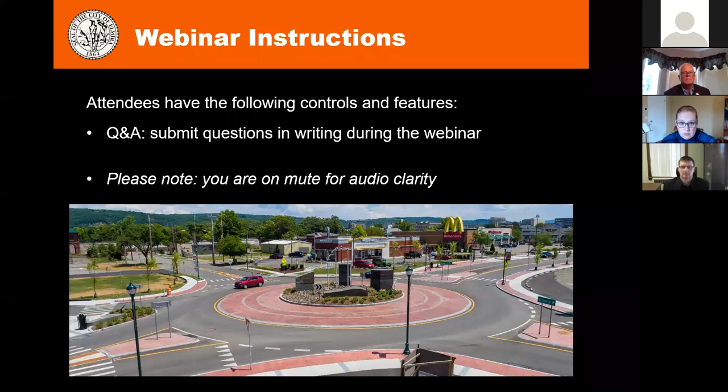I'm Emily Smith, Director of Transportation for Fisher Associates, and with me today presenting this topic are Dennis Judson, our Client Service Manager and Project Manager for this particular project, and Andrew Avery, the Public Works Commissioner for Chemung County and the City of Elmira.

Thanks everybody, I appreciate your time on this hot summer day for taking time to observe this video. This is a very exciting project. The primary purpose of the presentation is to discuss some of the different challenges associated with the design and construction of an urban roundabout.

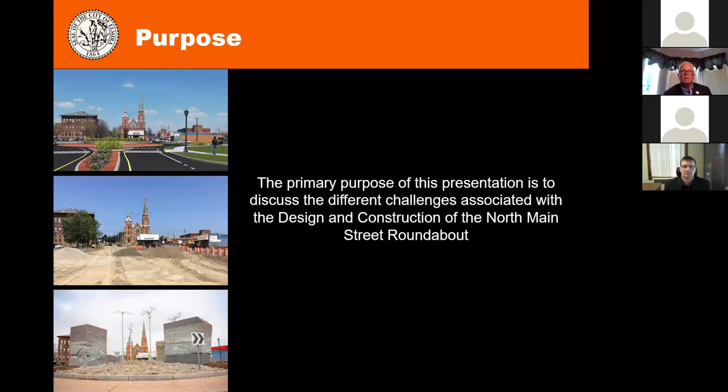Specifically the one at North Main Street in Elmira. The agenda today - I want to talk a little bit about the ownership, the location, history, some of the objectives, talk about specifics of the project, existing conditions, and then the majority of the project is talking about some of the project challenges we had along the way. We'll end it with some construction photos and open it up to questions.

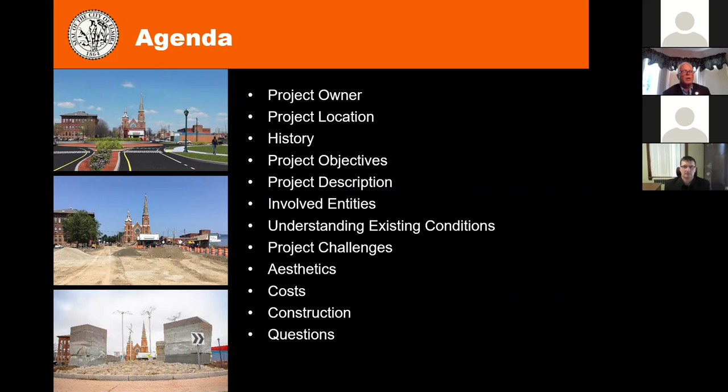The project owner is the City of Elmira, and Andy Avery, who is the Commissioner of the Chemung County DPW, also oversees all the street design projects for the City of Elmira. I want to thank Andy, his staff, both the county and the city, for their guidance throughout the project. It certainly wouldn't have been possible without them and without him specifically. Andy's going to take you through the history of the project, and then we'll get back to some of the technical stuff.

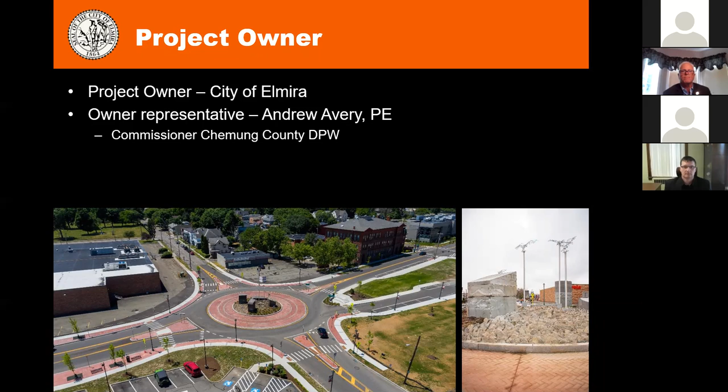Good afternoon everyone, thanks for joining us. Elmira, if you're not familiar with it, is in New York, in the southern tier. We're about 5 miles from the Pennsylvania border. We also don't have a ton of snow here compared to some of you along the lake regions and other parts of the state - we typically get under 40 inches a year, just to put it in perspective. So snow removal isn't as big an issue for us on roundabouts.

Our project area is actually at the very heart of our downtown, between Elmira College and our business district and commercial district. We're located near a McDonald's, a Weis shopping market, a Walgreens. So a lot going on in this direct area.

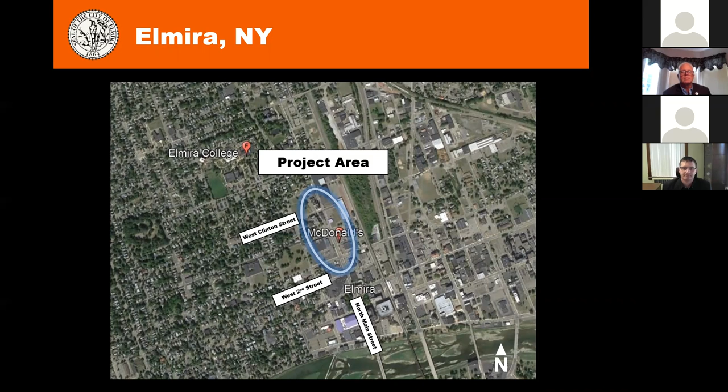Really, this shows you how important a comprehensive master plan is. You're not planning for tomorrow, you're planning for decades down the road. We started this project in 1998 with our last comprehensive master plan update. We were looking to strengthen our infrastructure, our roads, our bridges, colleges.

We have Elmira College, we have a Corning Community College campus, and now we have LECOM, which is Lake Erie College of Osteopathic Medicine, that has a new campus in Elmira. Also wanted to make sure that we took care of our manufacturing businesses, recreation for our residents, and try to maintain quality neighborhoods. I myself live in Elmira, so I want to make sure that this is a great place to live and work.

We're looking to improve vehicular circulation, pedestrian routes, and really reconnect those neighborhoods to the downtown. We're not just an automotive society anymore. We like to walk, we like to bike, and we want to make sure we got this right.

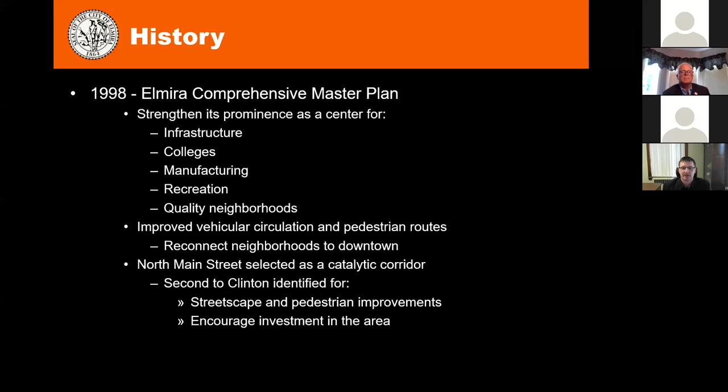North Main Street was actually selected many years ago as a catalytic corridor, and we looked at streetscape pedestrian improvements. We wanted to encourage investment in the area. And really this goes back to 2006.

When we partnered with DOT and Elmira College to study the corridor from 2nd Street to Washington Avenue. This took us all the way to basically the northern end of Elmira College. We looked at 3 phases - Phase 1 from 5th Street to Washington Avenue, Phase 2, West Clinton to 5th, and then Phase 3, 3rd to Clinton. This roundabout is actually Phase 3.

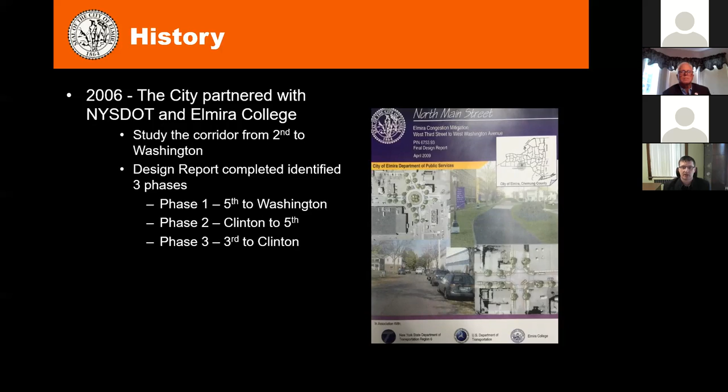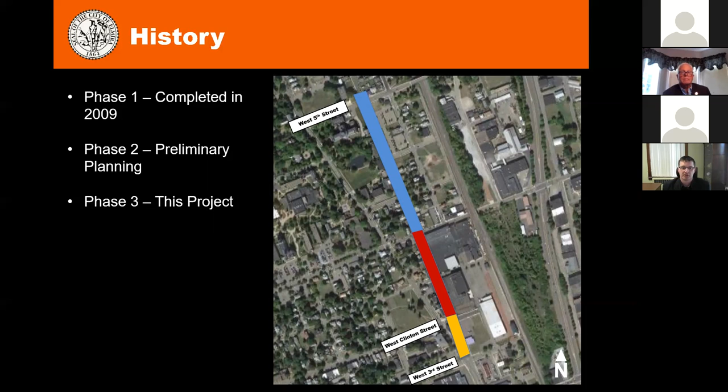So in 2013, we applied for a STEP application, Strategic Transportation Enhancement Program. That was competitive statewide. We wanted to expand the project to include more of North Main Street down to 3rd Street and 2nd Street, all the way to the viaduct. It's important to note we wanted to go to the railroad viaduct because it connected directly to our Elmira Promenade project, which now gives us a completed pedestrian bicycle corridor from the northern end of Elmira College all the way to the river. So that was an important part for us.

This project became known as the North Main Street Cultural Connector. We did receive $3.6 million of funding for the overall $4.5 million project. When I say the 3.6, that was federal and state funding that really got us a big part of the way toward completion.

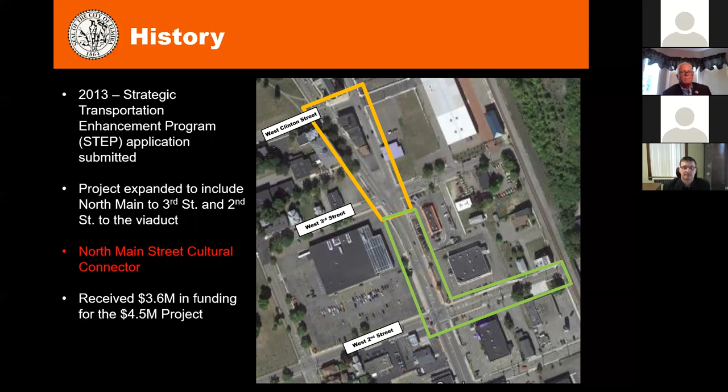So recall, the name of the project is actually the North Main Street Cultural Connector. You might ask why, and let's show you graphically. Here's the location of Elmira College, just north of the project limits, the educational center for the city. Then we have the Chemung Riverfront, which is being continuously developed. They're using a lot of the state's DRI money to do redevelopment in the area, and just because you're on the waterfront, it attracts people.

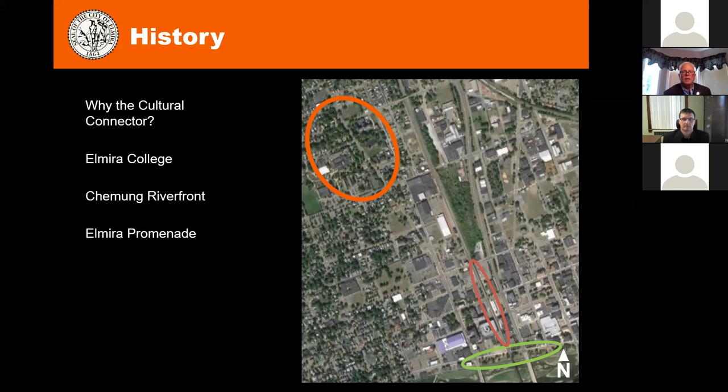The Elmira Promenade that Andy mentioned was a refurbished railroad viaduct done about 7 or 8 years ago, with the intent of drawing festivals, music, and people gathering to another part of the downtown area. In and around these two places was all the cultural centers for the city - the art museum, the history center, and a lot of the government activities as well.

So this project came along, and it kind of makes sense that it created a cultural connector, allowing people to walk safely to and from the different cultural centers in the city. So actually quite simple, but it has been a huge benefit to the city of Elmira.

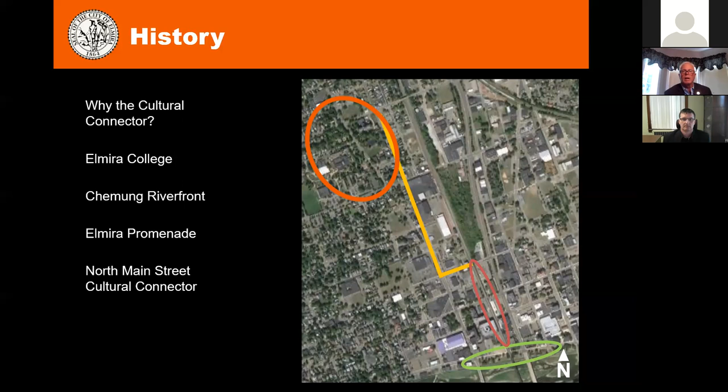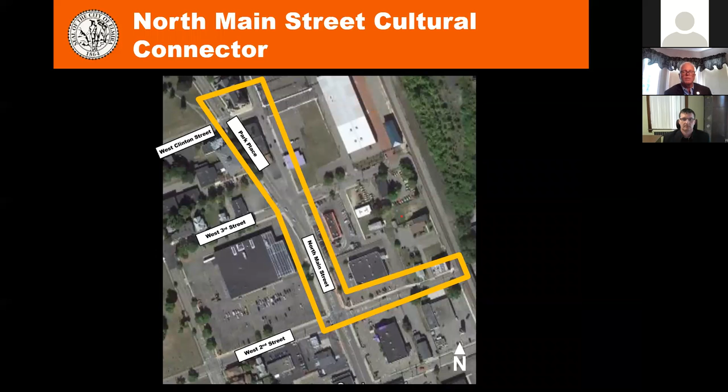So here's the project we have today, in its entirety. It's North Main Street from West Clinton down to 3rd, and 2nd Street from North Main Street to the railroad viaduct. This will complete the cultural connector.

Like most projects, we have project objectives, similar to some of the other ones you've seen in other projects. We wanted to make the pavement a lot better so it lasts longer. Like most older cities, pavements don't get a lot of attention over time, just general maintenance, so we want to make sure we create something that's going to last a long time.

We want to improve the pedestrian facilities. There's a lot of existing sidewalks out there with tripping hazards that don't meet ADA standards, so we want to improve those facilities. The primary focus of the project is to improve the intersection geometry at the North Main Street, 3rd Street intersection, with Park Place also playing a part, with an ultimate goal of reducing the potential for crashes and increasing safety for all modes of transportation.

And then finally, we wanted to create a complete street corridor, including the installation of pedestrian amenities, lighting, landscape elements, and other aesthetic features to make the area more welcoming.

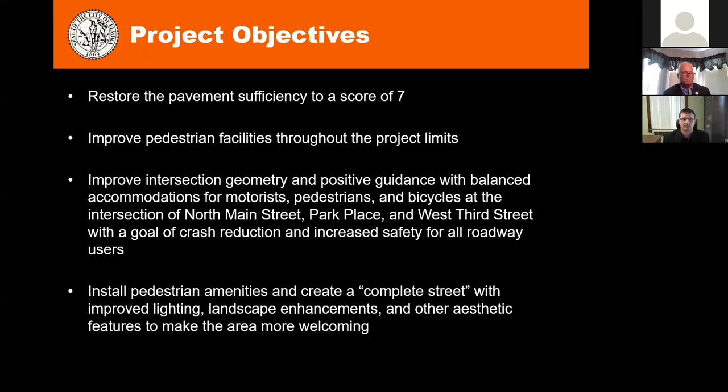So what's really the big issue? This picture identifies what the primary issue is. You're looking north, just south of the 3rd Street intersection. 3rd Street enters North Main Street just north of that green light pole. As you can see, there's a massive amount of pavement here with very little direction from either signing or striping on where you're supposed to be.

Really, the only spot you know where you're supposed to be is if you're in that red car on the left-hand side of the photo, coming southbound, you've got to stay to the right side of the yellow line. If you're a visitor or someone heading north, where do you go? North Main Street, as Andy mentioned, on the right is a continuous one-way northbound street on the right side of the split. The other side of the split, heading left, is Park Place, once it gets north of the point there, and that takes you into the educational center up to Elmira College.

From a pedestrian standpoint, you see very few markings. Pedestrians really have a difficult time knowing where traffic is going. I'll show you a video in a second and talk about how pedestrians really have a tough time getting across the street here.

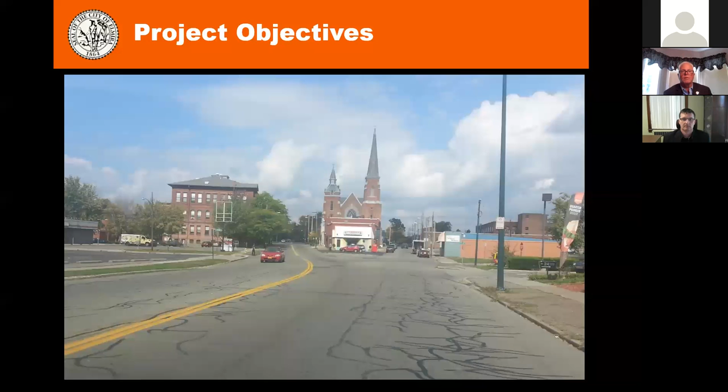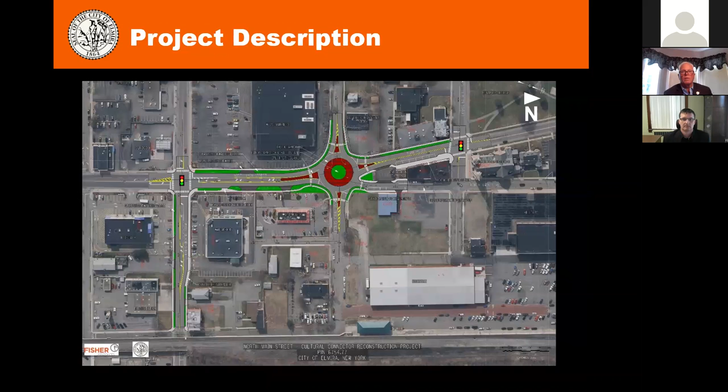Lots of coordination throughout the project, as you might imagine in a city. We have the City of Elmira, New York State DOT, and FHWA who provided the guidance and the funding. Elmira Water Board and the DEC who played a role in helping get us permitting and upgrading existing public utilities, along with the Chemung County Sewer District.

Public utilities, they were very helpful here. They got out of the way early. I'll talk about that in a couple minutes.

The emergency services, the fire department, police, we had a lot of coordination with them to make sure that they understood that this project was going to enhance their ability to maneuver through this intersection more efficiently and safely. And in fact, there is a fire station right on the project on 2nd Street, so they had a significant impact.

A couple other entities played a role. Elmira Downtown Development was a major factor in helping us get all the businesses together in one place to talk with them. And then an entity that was created during this project, not necessarily as a result of it, but the development of the Community Arts of Elmira, and they played a pretty big role in the development of a lot of the aesthetic enhancements.

And then of course there was the consultant team.

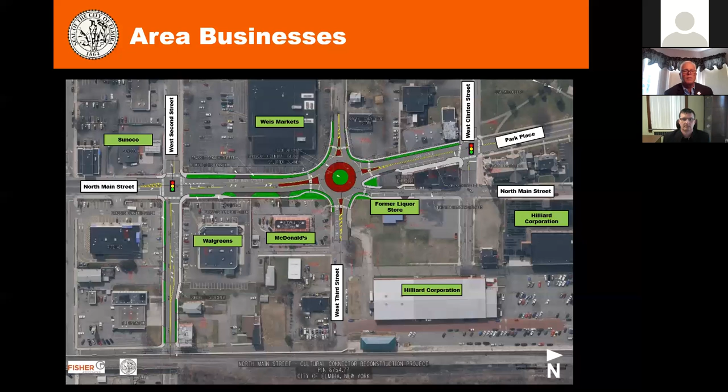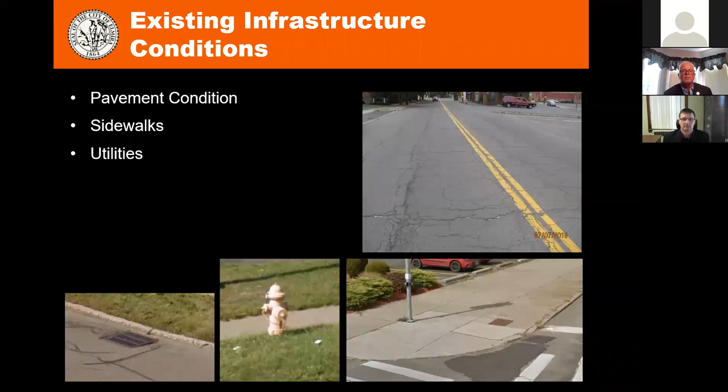A little bit about the existing conditions. Like most cities, keeping up with all your pavement, sidewalks, and utilities is an endless task. Not a lot of money in many cities, so stuff tends to not get taken care of as soon as it needs to be.

Here's a perfect example of the pavement and drainage in the corridor, in pretty rough shape and certainly in need of reconstruction. The photo in the top left was taken at the point area, at the split area, with some significant drainage issues.

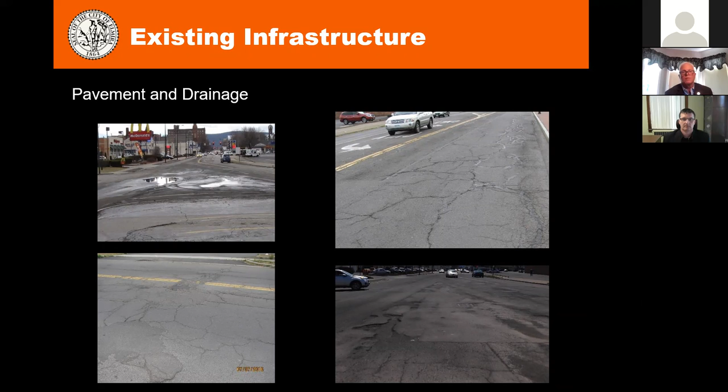Sidewalks existed throughout the entire project corridor. Some of them in rough shape, as you can see by the photo to the left. Some of them narrow and of different surface treatments. There were some areas where newer sidewalk was put in, either by city forces to repair some really poor sidewalks or by development.

And when the city or the development put stuff in place, they did everything they could to meet the ADA regulations at the time. However, as you know, they change over time regularly. And at the time of the design and construction, really none of it met the current ADA standards, so that all had to be brought up to standard.

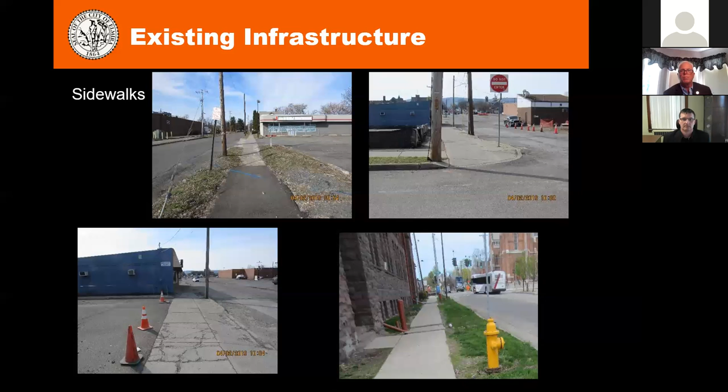Utility companies and utilities, talking about the private ones first. The City of Elmira does a great job of coordinating early on with all the utility companies. They knew this project schedule well ahead of time, the private ones did, and really, they got out of the way before we even started design. So with the exception of just minor connections for upgraded signals and lighting, the private utilities were out of the way well in advance of the project even starting.

The public utilities, water and sewer mostly, you can see go right through the roundabout, and we needed to address them during the design and the construction, and we'll talk about that in more detail.

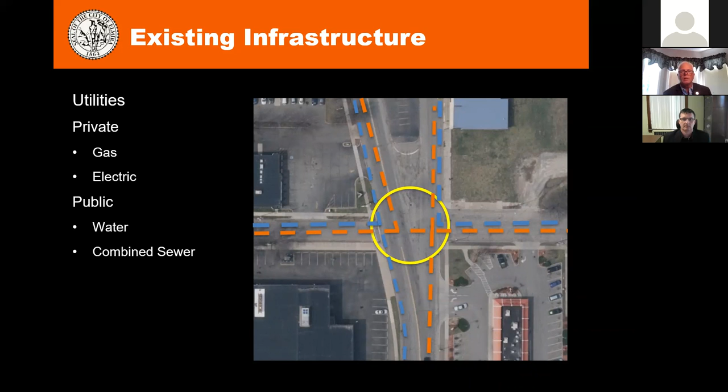From a traffic standpoint, we did the typical stuff, updating and collecting traffic volumes for all modes of transportation, doing our level of service analysis, and it was indicated that the volumes through the intersection were about 1,100 vehicles per hour, which equates to a little over 12,000 vehicles in a day.

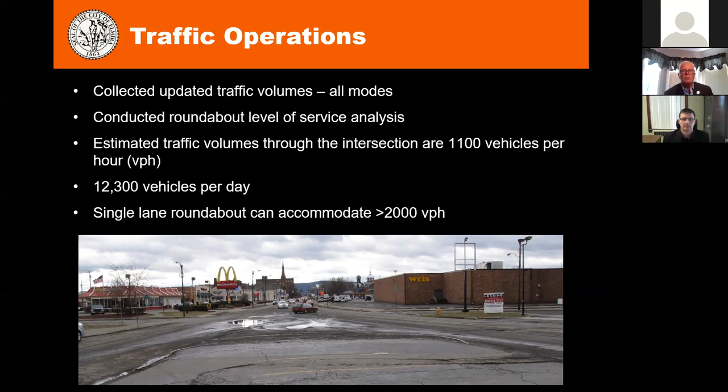For those of you who don't know, a single lane roundabout can accommodate a little over 2,000 vehicles an hour. So it really wasn't about the volumes, and certainly not just about the volumes here, because the roundabout could handle the volumes.

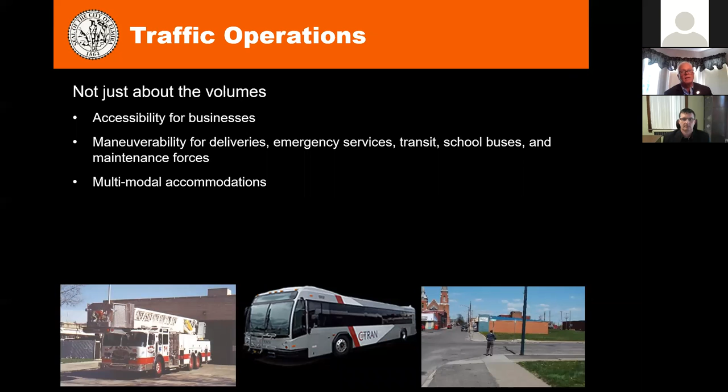Redoing the intersection with a roundabout was really about accessibility for businesses, maneuverability for delivery vehicles, emergency services, transit, school buses, making sure they could get through this intersection more safely and more efficiently. We also wanted the businesses to know how their businesses would be operating, how they would access their businesses after this was all done. In addition, we needed to accommodate all the modes of transportation.

We also had to look at the crash history. When we did the design report, we studied the most recent 3-year history. At that time, there was 22 crashes in the previous 3 years in the project area. 10 of them of note were at the specific intersection at 3rd Street, North Main Street intersection.

We then looked at the previous 7 years, so 10 years in total, and at that specific intersection there was 24 accidents. So as you can see, the 7 years leading up to the 3 there was 14, and then 10 in the last 3. So the number of accidents was increasing. That's not a good thing. In fact, the crash rates ranged up to 5.07 times the statewide average for similar facilities. So making it safer for everyone was important.

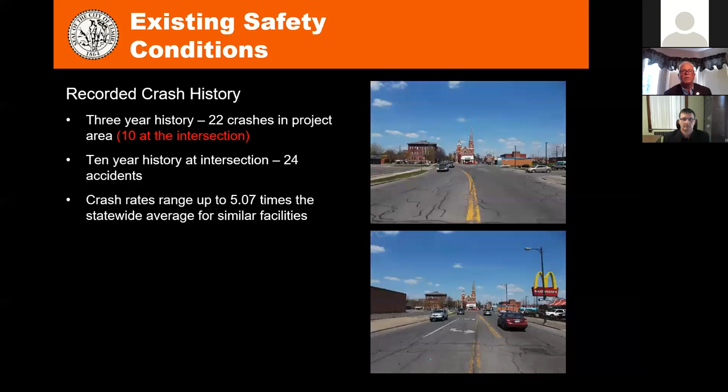A little bit of summary of some of the accidents that happened out there. Of note, 3 of the accidents were either pedestrians or bicyclists. And of specific note, 9 right angle accidents occurred at 3rd Street.

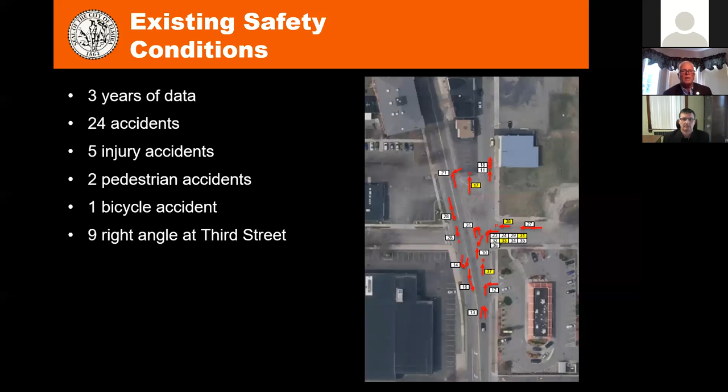Well, I can tell you that vehicles came out of 3rd Street, turning into 3rd Street. They'd get in the middle of that mass of pavement and really not know what to do, not know where the oncoming traffic was coming from. So they'd sit there. Sometimes they'd change their mind and go further south. But it really confused the pedestrians because they really didn't know what any of the traffic was going to be doing, or a lot of the traffic wasn't going to be doing. So a lot of unusual things happening in the intersection, primarily because of the massive amount of pavement.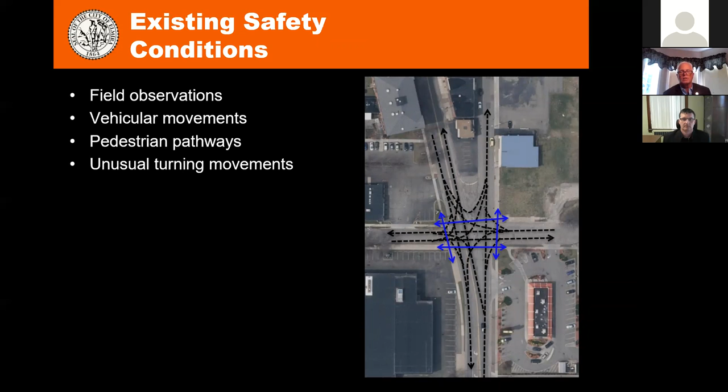I'll talk a little bit about some of those pedestrian moves. The typical standard move across the intersection, shortest path, would be perpendicular across at Main Street. It's about 70 feet long, not untypical for an urban setting. It exposes you to traffic for about 20 seconds. And remember, this is uncontrolled traffic north to south.

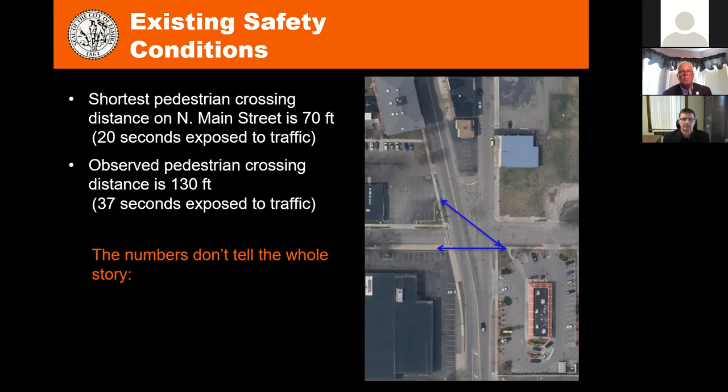But what we observed the overwhelming majority of the time, because a lot of pedestrians were coming from the north, the college area, or from some senior living or low-income housing that maybe didn't have cars, or going northbound the opposite way, they would take that diagonal route, which exposes you twice as much, almost 130 feet, and almost twice the amount of exposure to traffic. So some dangerous situations. But the numbers don't necessarily tell the whole story, just those distances in time.

Here's a graphic many of you have seen before, showing the conflict points. On the left side, the red dots indicate the 45 different vehicle-to-vehicle conflict points in this 5-legged intersection, and 28 vehicle-pedestrian conflict points indicated in yellow squares. So a lot of different conflict points at this intersection, and when you add the expansive amount of pavement, it just exacerbates the situation.

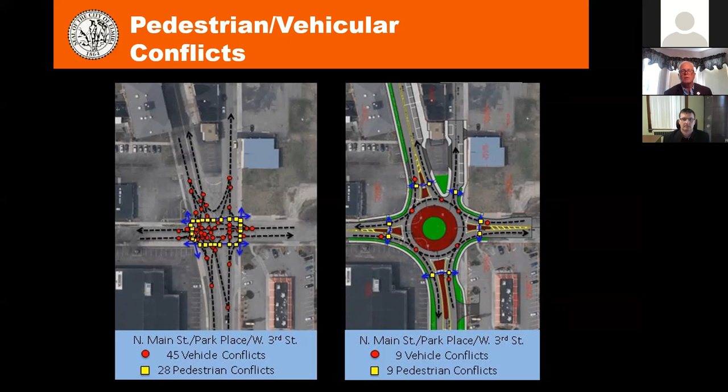I didn't want to bore you with the design details of how we came up with the splitter angles and the radius, developing the radius of the roundabout and the inner circle. I wanted to talk more about the challenges we ran across in the design and construction of an urban roundabout. Some of them, if you have something like this in your future, may not be exactly similar challenges, but they may be similar. So I wanted to talk about the ones we ran across in this particular project, and I'll cover each one in more detail.

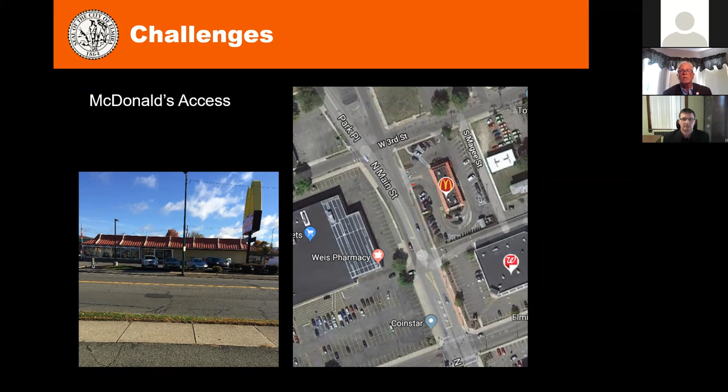First, the McDonald's access. The McDonald's is located at the southeast quadrant of the intersection. Having spent a lot of time down there, I can tell you that coffee in the morning, lunch at noon, and dinner at night, this is one of the busiest McDonald's I've personally ever seen. Their driveway access is near the northern part of their property, very close to the intersection. I'll show you this on a set of design plans.

The yellow driveway is where their driveway was located. As you can see, people were exiting and entering in the splitter road, which is certainly not a safe situation. So simply, we needed to relocate it. It may seem simple, and in some cases it would be, just shift it south and move it further away from the intersection. But there were a couple of issues.

When we were in the late stages of design, at the same time, McDonald's, as many McDonald's throughout the country are doing, decided to do a reorganization and reconfiguration of their entire on-site operations—not only how people went in and out of the building, but where deliveries were made and where their drive-through was. That was a major issue changing at the same time we were trying to finalize our drawings.

So we had significant coordination with them, and came up with the driveway highlighted in blue. The intent of that driveway is for people to enter, circulate the building, and get in a drive-through queue now located at the south end of the building, a dual drive-through. But people really want their hamburgers and their coffee, so a lot of unusual things were happening, primarily because they didn't want to circulate the building—they would come in the entrance and jump the island to get in the drive-through queue that way.

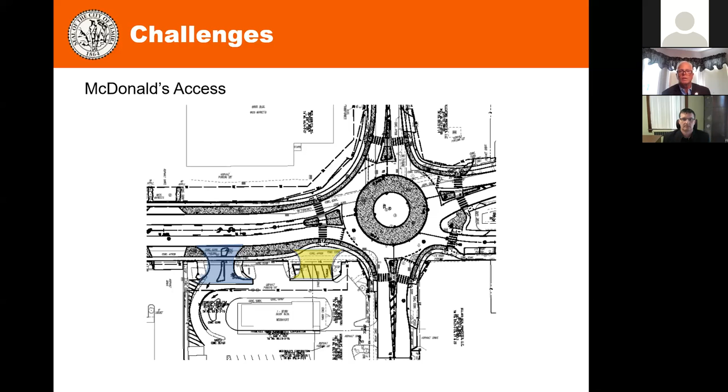The public utilities. We've got the combined sewer and the water line. I want to talk about the water line first, because that was a unique situation.

Typically, in a lot of designs, any relocations or need to upgrade get included in the design plans. But the Elmira Water Board, who is a separate entity, felt like they had the resources, the time, and the staff to do this on their own, because there was time to do it. So they elected to do that.

The problem is that they wanted to do this before we had completed the design. Matter of fact, they wanted to do it when we were still in the preliminary design phase. So we were able to give them what we had at that phase, which was primarily curb lines, finalized or pretty close to final, but very little, if any, drainage.

We did tell them if they did it before we were completed with design, there may be a need to relocate some of their water line. So we gave them our drawings. They went out, relocated based on those drawings, and sent us their point data. We replotted the new relocated water line, and then we moved forward our design.

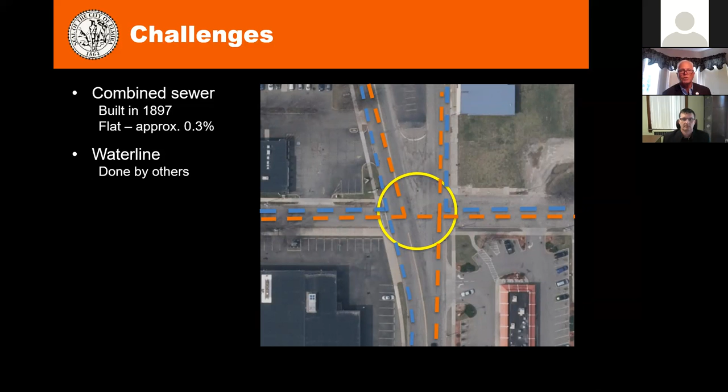The sewer, built in 1897, very, very flat. Here you see it superimposed over the design drawings. As you can see, it goes right through the center of the roundabout. You'll see later on what ends up in the middle of that roundabout, why we had to get that out of there for future maintenance costs, because it's a system well over 100, over 120 years old, and you're going to have some maintenance issues.

Our concern was the flatness and the fact that we had to separate combined storm from sanitary, because Elmira is in an MS4 area, so we had to separate the sewers, and we had to maintain at least enough flow so there wouldn't be debris.

We got a little bit fortunate because here's the configuration we ended up with. We were able to sever the north-south route that went down to 3rd Street and reduce some flows, which allowed us to reroute the main sewer to the north of the roundabout and still maintain enough gradient on it to not create a situation where we have debris buildup in the pipes.

So the bigger issue became trying to connect materials made in 2018, 2019, to materials that were put in place in 1897.

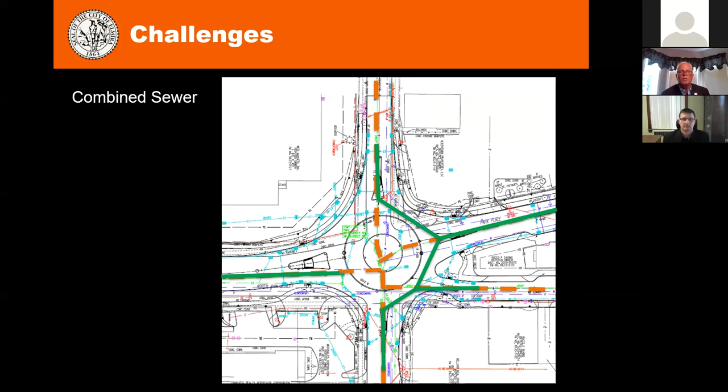So dealing with your utilities when you're building a roundabout can be quite a challenge. I want to talk a little bit about the community. Some of the things I'm going to say, I'm allowed to say because I'm a native of Elmira, and my family still lives there. So I can tell you that the city of Elmira in general just does not like change. It's changing a little bit with some of the leadership, but it basically doesn't like change.

When this first started getting in the press and the media, people were like, what the heck are you doing? This is a dumb idea, you're going to put me out of business. Stop this nonsense. Nobody will come, I won't be able to figure out how to get around that roundabout, I won't be safe. Even my grandmother was not very happy with me. So just not understanding the benefits of the roundabout really was making people not want this to happen.

So we decided to take a different approach versus just having me stand up in front of the community and the public for an hour, hour and a half, talking to them about the numbers and the safety and everything. We came up with a program that was really an education program. We wanted to educate the community as a whole before we started any design.

We held a meeting with city council, including the mayor and the city manager, to talk about these things, like the graphic I showed you before, about the safety benefits, how it would help the businesses in the long run, and how it would help bring economic development to an area because you made it safer and nicer looking. That way they would be educated and able to go to their constituents, hearing from their own representatives versus hearing from a consultant that they don't really know.

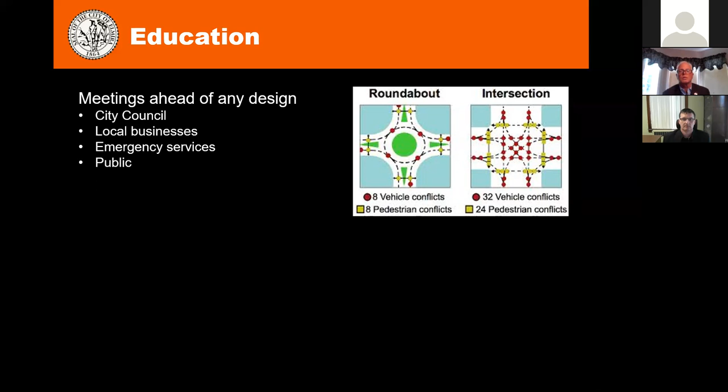So we had several meetings with the local businesses, just them. We had separate meetings with emergency services because we wanted to ensure them that all their vehicles would be able to maneuver through this intersection safely and more efficiently. We offered to create this graphic you see, a mock-up roundabout in a parking lot somewhere locally in the mall area, to have them bring their vehicles and allow their folks to maneuver through a mocked-up roundabout.

They did not elect to do this. They kind of put trust in us that we would coordinate with them and make sure all their vehicles would be able to get through safely and efficiently. And then the public had anxiety. We met with them with the approach of education, not trying to jam something down their throat, but helping them understand the benefits to the community as a whole.

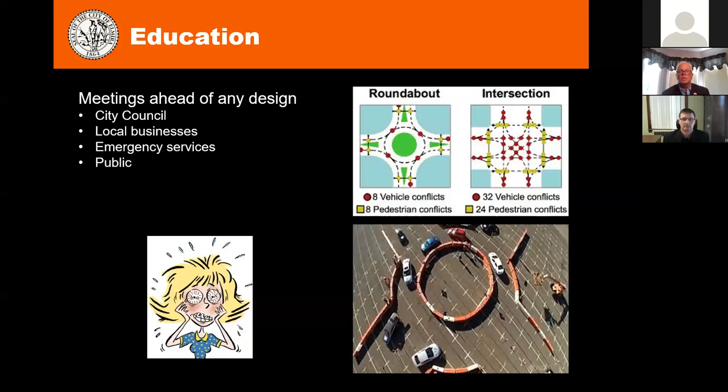We felt that the whole process was very successful. I'm sure it was successful with the city leadership, the businesses, and the emergency services, and we thought we had success with the public. But after our public meetings, we had this. So I don't think we helped some of the public through this whole process.

There's a faction of the community that was not real happy with this, no matter what we told them, and tried to stop the project. But we were moving forward because the city leadership knew this was for the betterment of the entire city. Time will tell, I'm confident this will be a benefit, but I guess Andy and the staff and the city will tell us as time goes by.

The last challenge I want to talk about is the aesthetics. This challenge was more fun than it was a challenge, but it was kind of fun. Here's our palette. We had this empty palette of a lot of new areas to provide landscaping, streetscaping, and amenities. And then we had the roundabout, which was a large landscape palette by itself. Our goal was to create a nicer area for everyone to be around, pedestrians, bicyclists, vehicles, business owners, just a nicer place to be.

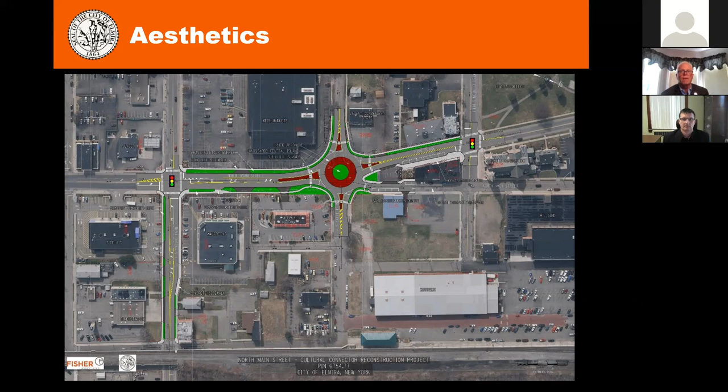Our intent was to create a dual gateway at the roundabout, a gateway for people traveling south to north from the city into the educational area and points north, and for those traveling south from the educational area into the city. We wanted to create a dual gateway that would serve both purposes.

The first thing we did was create a well-rounded task force made up of local representatives, city and county engineering, New York State DOT, veterans organizations, the community arts, the general public, and of course the consultant team.

We wanted to develop a theme. We couldn't just go willy-nilly and start throwing different amenities out here. We wanted it to mean something and have a purpose. So our idea was to develop a theme based on the history of Elmira, the people of Elmira, and the geography of Elmira.

After several iterations and meetings, all really productive meetings with that entire task force, we came up with two primary themes to discuss further.

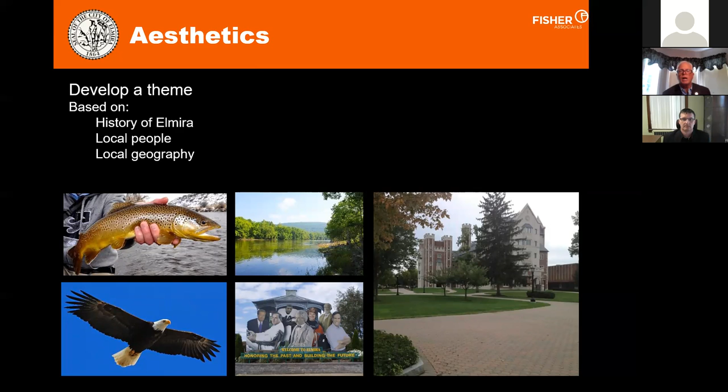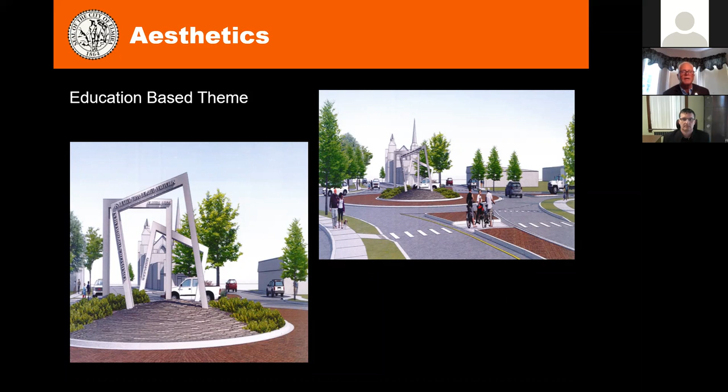First, an education-based theme because of its proximity to Elmira College, where the center of the roundabout would be focused on education. The second theme was an environmental or geography-based theme, which would focus on the surrounding topography, the river, the mountains, the birds and fish, and so on.

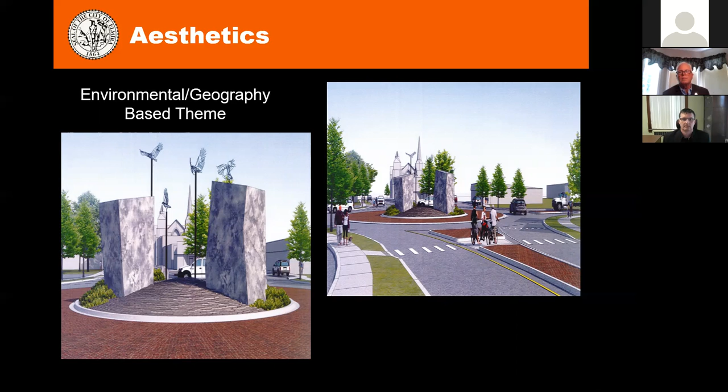What we concluded was a combination of both, where the central island would focus on the geography theme - local quarries, the Chemung River, birds of prey, native birds and fish. On the outskirts, primarily on the sidewalks, we would include quotes in granite from local artists, famous Elmirans, and famous Elmira scholars. So we brought both themes together into one. I'll show you some pictures of the ultimate outcome in a few minutes.

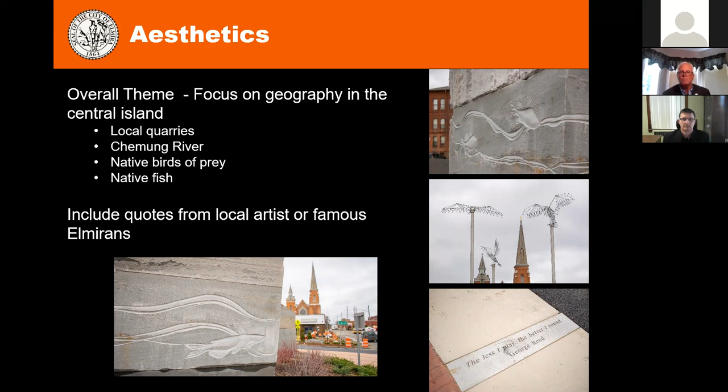This did not go without a glitch. DOT was involved throughout this process, and once we got to advanced detailed plans, they were reviewing the design and we got an unexpected comment: you can't have those boulders in the central island of the roundabout. We shrugged our shoulders and said, what happened? We've been doing this for over a year. Well, they actually had a very good reason for bringing that comment up.

South of Buffalo, in New York State DOT Region 5, there was a rural roundabout that had much smaller, but nonetheless, boulders in the center island. A vehicle traveling late at night at a speed higher than the limit, with the driver having had a couple drinks, did not follow the roundabout, went through the center, hit a boulder, and was fatally injured. So that's not a good situation for anyone.

The state, rightfully so, did not want to introduce something that was going to be a hazard. So what do we do now? We're nearly complete with the project, and the funding has some time constraints on it. What are we going to do?

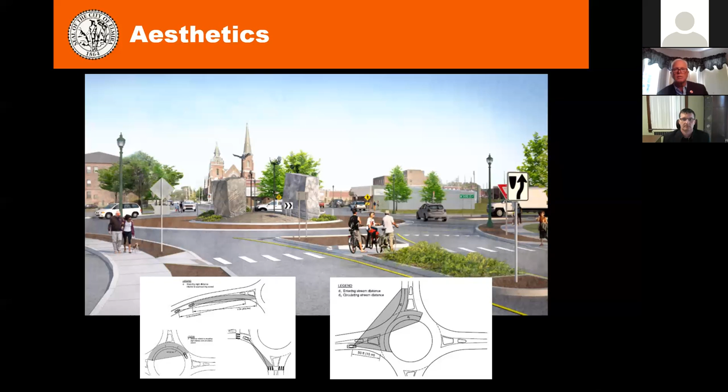Ultimately, New York State DOT agreed with our position and allowed us to move forward with our original design. And thank goodness for that, because this could have been a whole different presentation if that was not the case.

So what we had envisioned, back before construction and before detailed design ever happened, was this: the large boulders representing local quarries with flat top mountains indicative of the surrounding area, a wireframe of birds of prey, the osprey and the bald eagle. The stones between the two boulders actually represent the riverbed of the Chemung River.

So this is what we had envisioned, and this is what is out there today. I've got some more current pictures that'll show you as it's a springtime thing. But this is what we had today - pretty good representation. The contractor and design team were able to recreate what was envisioned in a very good way.

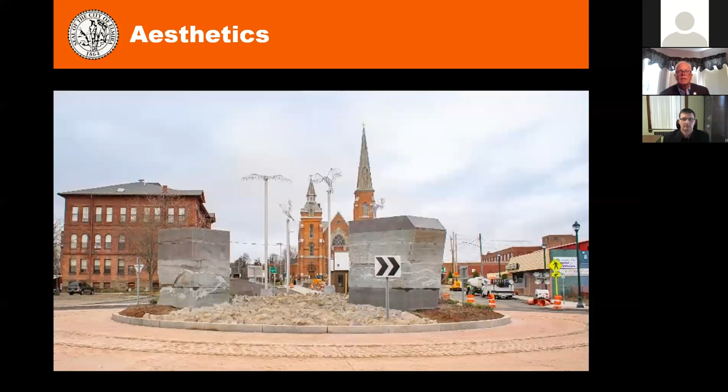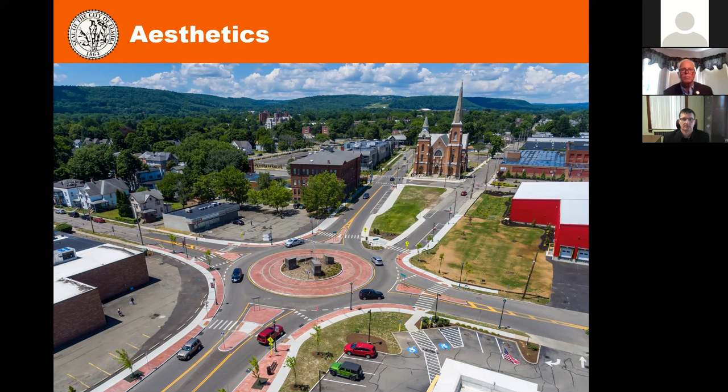Here's a drone picture of the intersection itself. Please notice the beautiful church in the background, and the fact that there's no buildings in front of it. I want to tell you a quick story as we get through this about that building, if I have time.

A little bit on costs. We initially bid it in April 2018. As I mentioned, it was delayed a few months because of the boulder issue - we were going to do it in January. We all knew the risk of bidding it in April, that we were condensing the construction season, so it could be reflected in higher bids. But we wanted to do it anyway - we didn't want to miss an opportunity if there was a hungry contractor out there.

We did bid it, and it came in about $500,000 above our engineer's estimate. So we decided to rebid it again. We really didn't change anything, except we had a few add alternates included in the original bid, which we consolidated into just one base bid. We rebid it in January with an engineer's estimate of a little over 4.9 million. The bid came in at 4.6 million, and was awarded to Sealand Construction. They've completed the job, and I can happily tell you the final construction cost came in below the bid price. That makes everybody contributing money a lot happier.

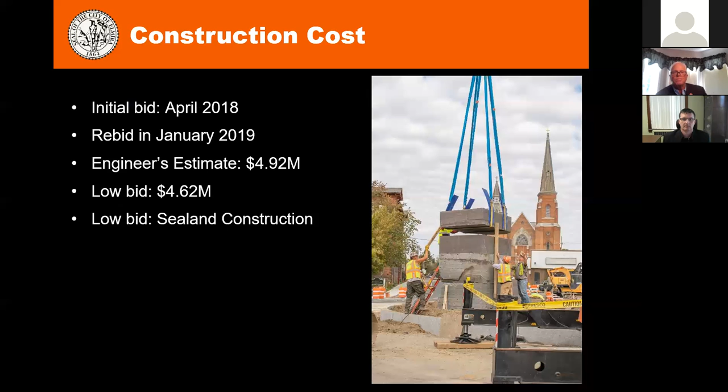I want to show you some quick construction photos. I'll talk as I go along because I know it's getting a little late in the game, but people have all seen construction photos.

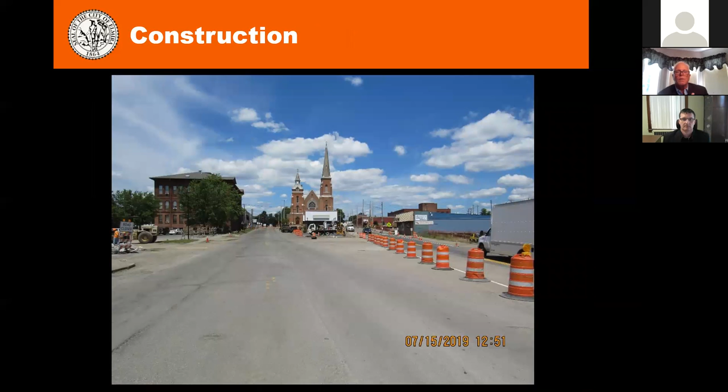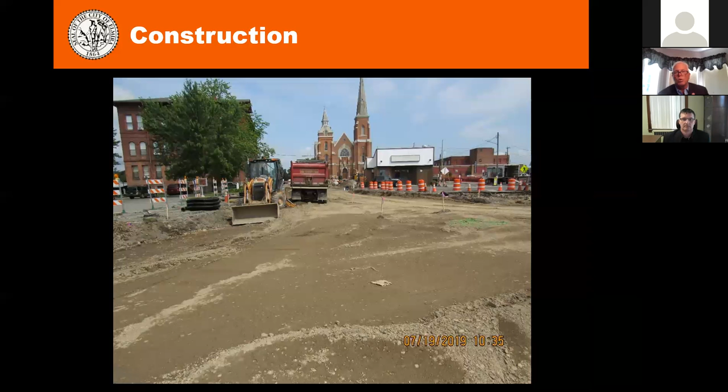A couple of things to note: we were able to maintain traffic on site, with the exception of large trucks who were detoured during construction of the actual roundabout. That does not mean that they followed the detour route - some of them did not. They ruined wet concrete and hit some poles that were in place. So we couldn't design around people who won't follow the rules, but we were able to maintain traffic on site for the most part.

The church in the background - real quick story. There's a building there, it's Evergreen Express Chinese restaurant. When I was going through early stages of design, I really thought, boy, wouldn't it be nice if that building wasn't there? We weren't impacting it by the design of our project, but wouldn't it be nice? So I created a photo simulation with the building gone and presented it at the public meeting, which made the owner very, very unhappy. He said, 'What are you doing, taking my building?' I tried to reassure him we weren't, but it was a mistake on my behalf not to talk with him and explain the situation first. So just be aware of that kind of thing.

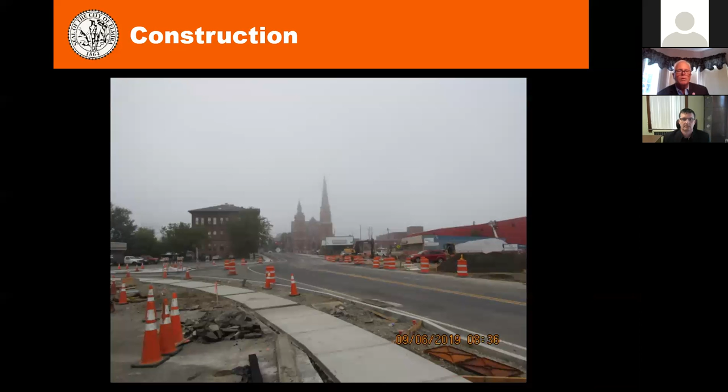In the sidewalk pictures, you can see where we're creating spaces for the granite curb to go in with the engravings. Here's the truck apron, nearing completion, and a picture of what the church looks like with the building in front of it.

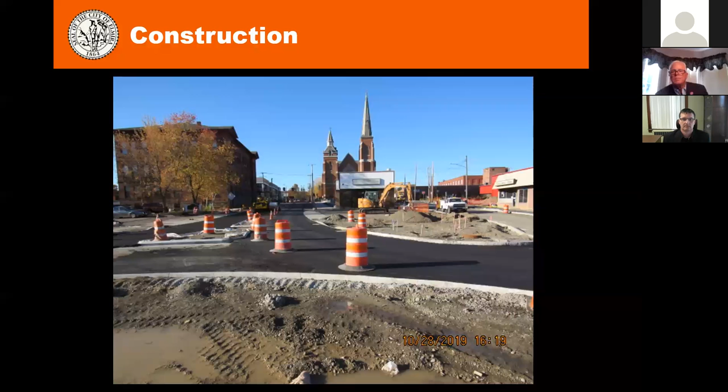Here's a picture of the day they put the boulders in. This area is an educational area at the point - we actually installed an informational sign describing what all the elements of the central island were, so people weren't asking what the heck all that stuff means.

One element is missing here - there was a pad out there for a statue, intended to be a statue of a pig, Patty's pig to be specific. The history of Elmira shows that there was at one time a pig that wandered this part of the city, affectionately known as Patty's pig. It was originally in the design plans, but FHWA - for some reason, I say that jokingly - didn't think that was a transportation element, so they didn't want to pay for it, and it was taken out of the project. Hopefully someday the city finds money to commission someone to create this pig and put it there, because it's a pretty unique part of the city, and this was the area where it wandered. For those interested, if you Google Patty's pig, or Paddy's pig, Elmira New York, I guarantee a picture of the pig comes up.

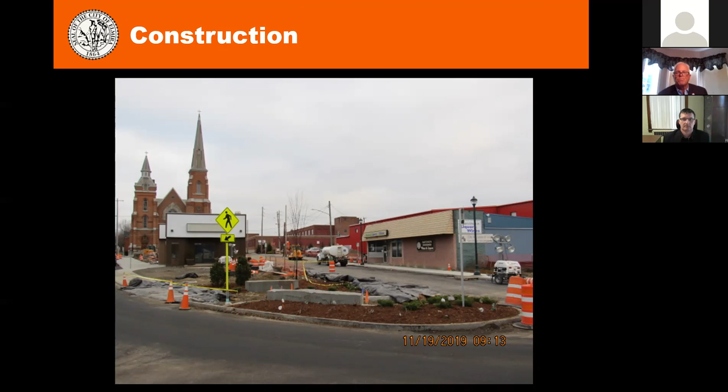These boulders could not all be brought to the site in one piece. They had to be in 3 or 4 pieces in some of them because of how heavy they were. So the contractor was not willing to just haul granite from central Pennsylvania to the project site and then have the city or the consultant say, well, we don't like that. So they asked us to go to them.

So myself and Roger O'Toole, a former employee of the city, made the trip, about a 4-hour trip down there from Rochester, to see the stones.

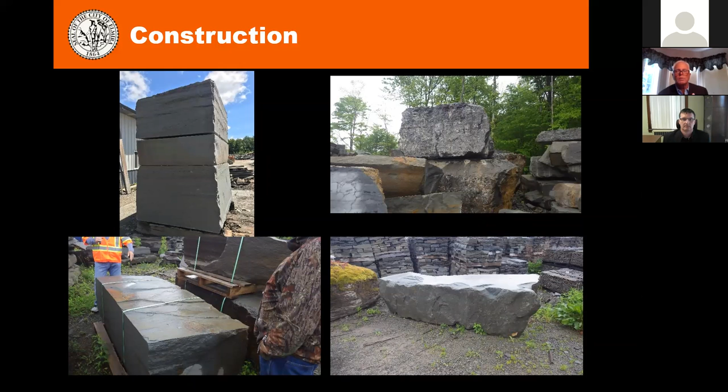I did learn a lot about quarries and how they operate, and I learned how they actually cut granite, and it's actually not a very safe operation. So some of those safety issues prevented us from cutting stones the way we really would have wanted them to. But I did learn a lot about quarries and cutting stones.

It took them about an entire day to place them with a crane on site, with several workforce to do it, making sure it got level both horizontally and vertically. So it was a very interesting process.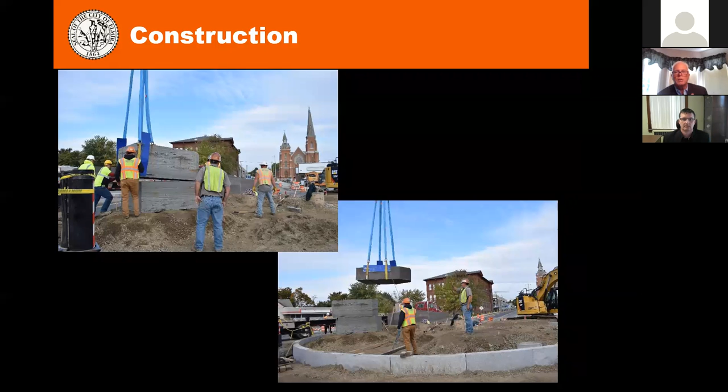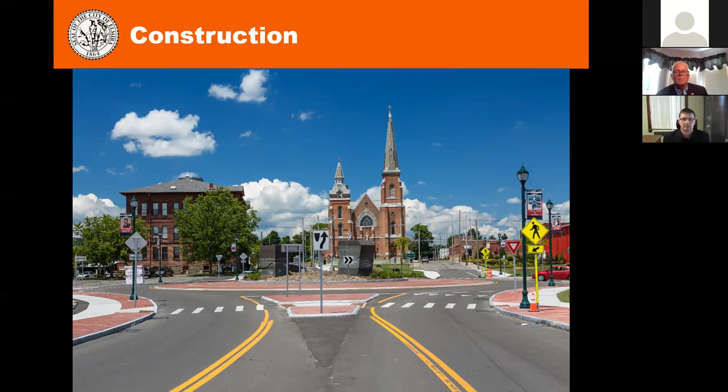What happened was another entity, Andy mentioned them, the name slips my mind right now, but they bought the building, tore it down, and were donating it to, I think, Elmira College. But it looks a lot better without the building there. Let me go back one. Here's another area, another drone photo of the area.